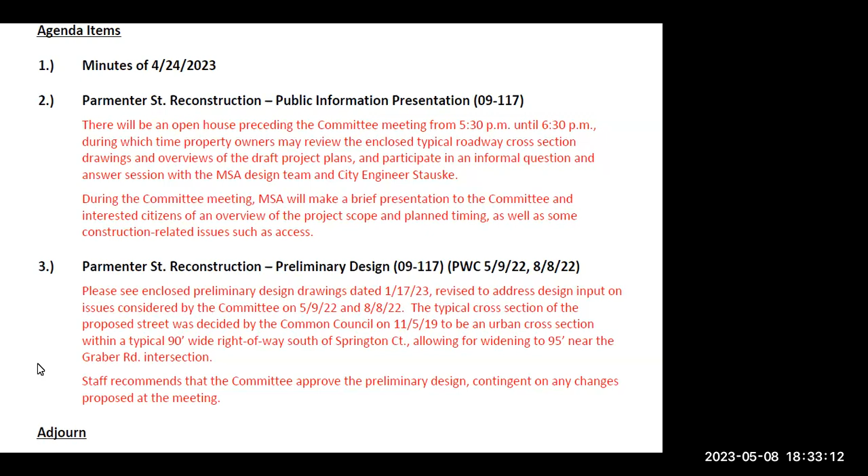We have a design team from MSA Professional Services with us this evening. They were here for the open house, so many of you already got to meet them, but I'll say hi to Krista Sommerfeld, who's been doing a lot of the design work, to Bill Pinow, who's the project manager, and to Kevin Lord, who oversees it all. MSA is here, and I've got slides that'll show up on the TV, but I warn you up front, the TV may inexplicably and without notice turn itself off every now and then. It just needs a rest.

Sean, before you begin, can you turn on - I have a speaker on my meeting that says council chambers. Is there any way that you can do that so I can see the council chambers? Is there any way you can turn that camera on, or is that not possible in this format?

That's a good question. Let me see why that's missing. Yeah, hold on a second. Thank you. I think that's where the audio is coming from, if that helps. Testing. There it is. Thank you. Did that work? Yep. I tell you, if you push enough buttons in this room, something happens. Thank you very much. Yeah, well, good call.

All right. So I'll turn it over then. Is that microphone on? Is there a little green light on the top of it? Yeah, Krista figured it out, so I think we're good. Sweet. That's usually my Achilles heel. All right, Sean, thank you for the introduction.

Again, my name is Bill Pinow. I'm the project manager for the Parmenter Street project, and we're just going to give you a high-level overview of the project to date. Sean's going to go through some slides. You can go on to the next one, which is just the introduction of who's here tonight, in addition to Kevin Lord, who's also a team leader. Go on to the next one.

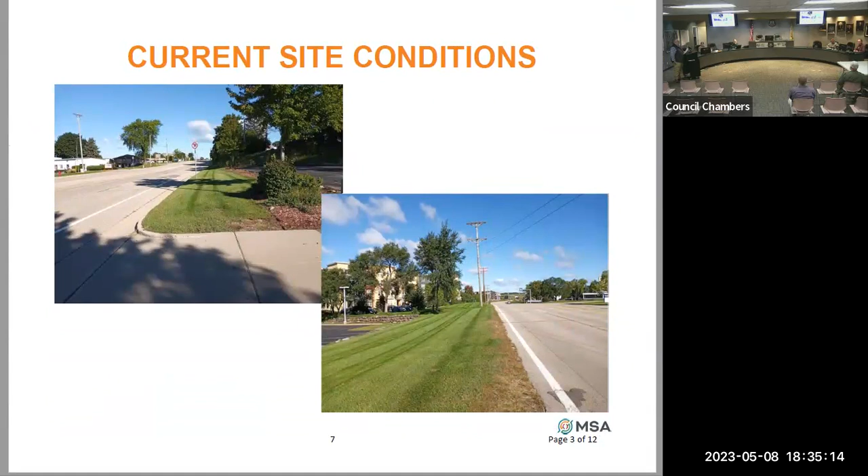We just included a couple site photos of Parmenter Street. We met several of the property owners located along the property, so everyone knows what we're talking about here, essentially from Century Avenue to Greenbriar Road, which is currently a rural cross-section roadway that we'll be reconstructing after working with Sean and city staff. We can move on to the next one - again, just another photo of current conditions out there.

The project goals are to reconstruct Parmenter Street, again, from Century Avenue to Greenbriar Road. We are essentially converting the rural section into an urban cross section that will have bike lanes, sidewalks, and a multi-use path connecting to an existing path at the north end. In just a few minutes, Krista will go through more detail on those cross sections, but that cross section is something we've worked on with Sean, the city of Middleton.

The design intent is to have a median at the center of the two lanes, and that will be grass temporarily. In the future, should there ever be additional capacity needed, that median can be converted into additional lane storage. Because we're adding additional lanes to the project and additional impervious surface, there is going to be some added stormwater management requirements.

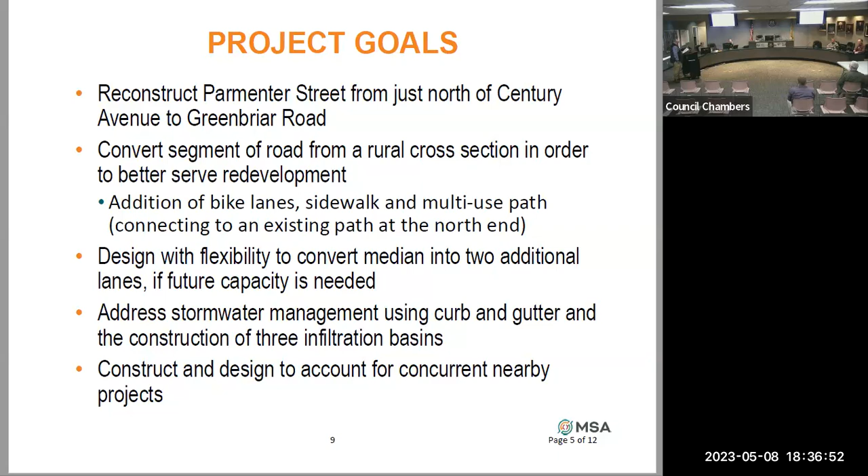So we've got some infiltration basins that Krista will show the locations of as well. The project is also designed to account for some additional projects that'll be in the area, like Bell Farms and Tribeca. This is just a project overview showing the extents of the project - like we said, up to Greenbriar from Century.

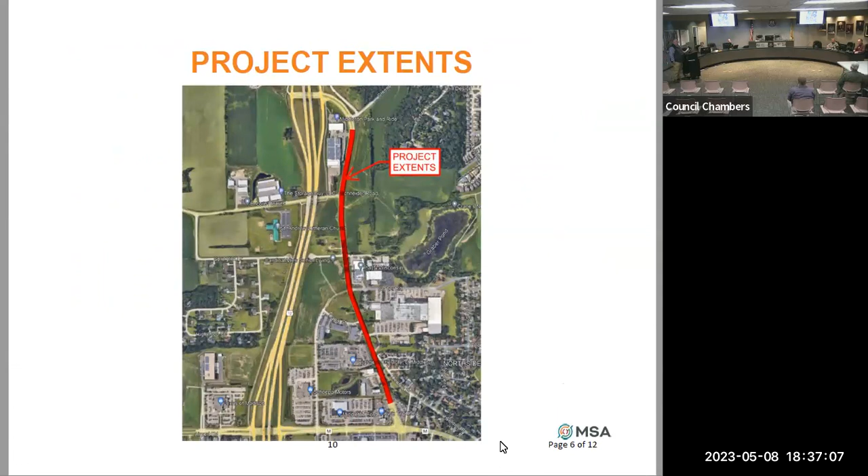It goes black on your end too? Yeah, it does. Okay, so the black screen you're looking at, there it is.

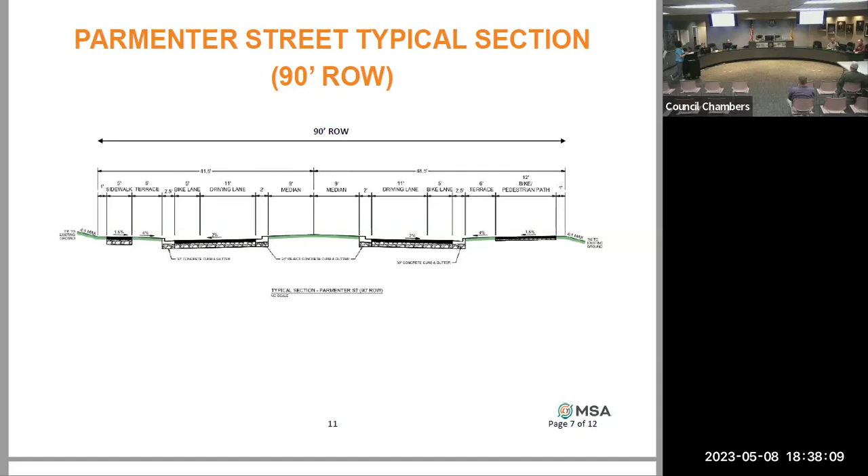As you get further north on the project, this varies a little, mostly with the terrace space widening. We have a little more width in the right of way on the north end. Furthest north, we are eliminating the bike path and sidewalk, but that's adjacent to the operations center building up there.

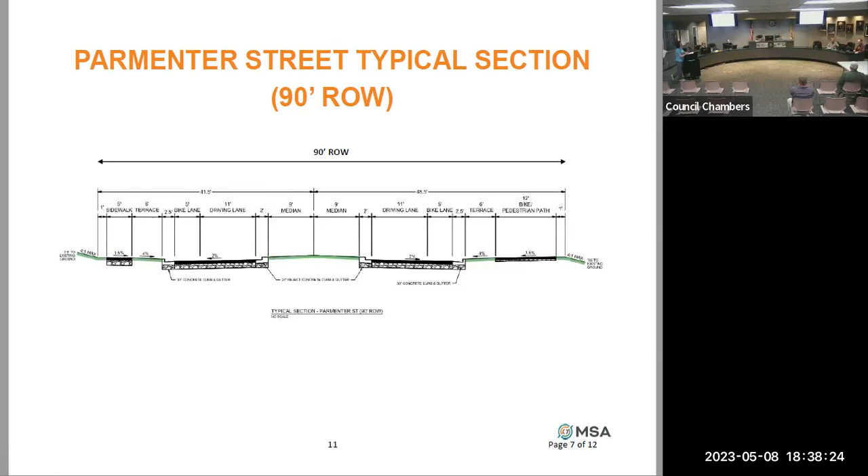As far as the stormwater goes, we need to account for additional impervious area. The majority of that is on the north end. We're converting it to curb, or from a vegetated area to a vegetated swale to a curbed area.

Again, those are located in the right of way. The final design is not done yet, we're waiting on some more information, but essentially linear ponds there. Some other aspects of the design include storm sewer throughout the roadway, including some basins to collect water behind the sidewalk and trails, and also some minor water main work, including some hydrants.

Kendra, did you have your hand up for a reason? Yeah, can you have her check her microphone, because I think it cut out. Is the green light still on? Maybe the batteries are dead. That happens too. Batteries go dead, but they don't take out the green light. Let's hope not, the green light came back on.

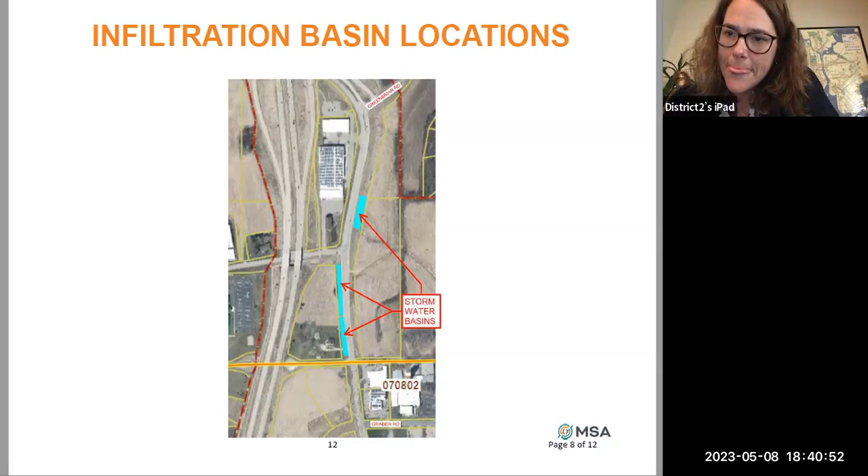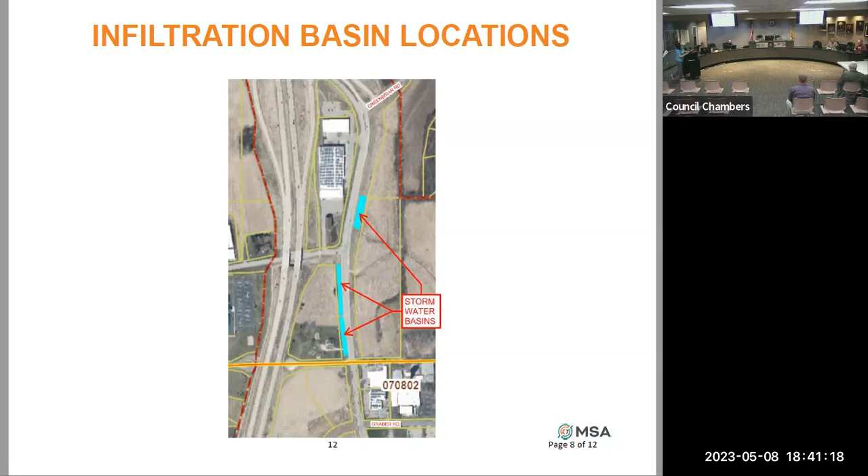Okay, yes, hopefully this one works okay. Oh, black screen. Okay, that really sounds, this one works really good. I can hear it, right? Yeah, I can hear you. Look at that. You can go to the next screen. Sure, but thanks for that feedback, I appreciate that.

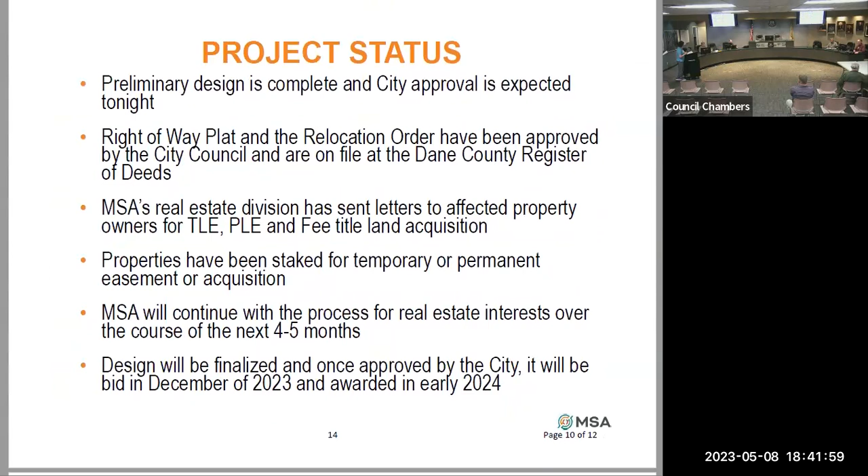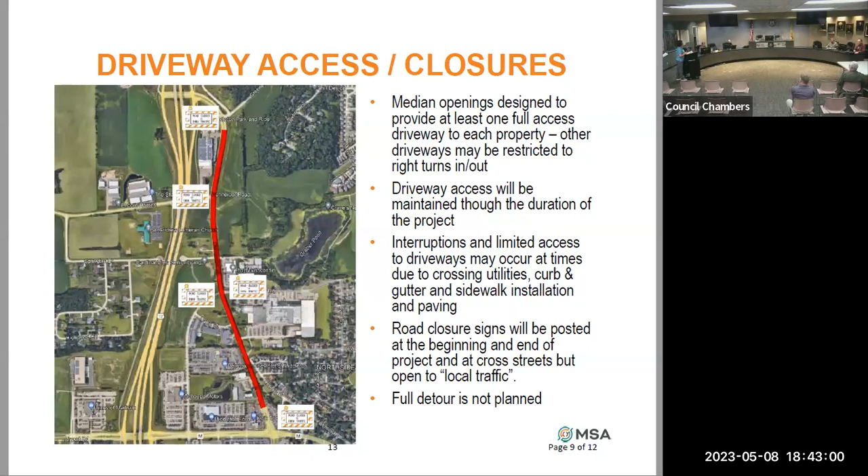We're not planning on posting a full detour route. We can talk more with Sean if we need to about that, but just road closed, local access only.

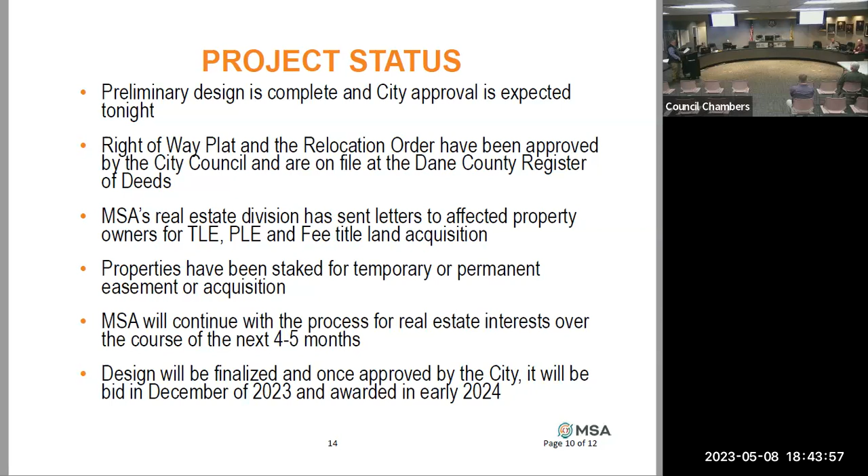As far as other items that have been completed, we have completed the right-of-way plat and the relocation order that has been approved by the city council, and that's currently on file at the Dane County Register of Deeds. Any property owners that have real estate interest in the property, I believe 16 letters have been sent out, so everybody that we talked to tonight has at least had that initial contact. Those discussions will continue for the next 4 to 5 months after the properties are appraised, and then there is continued discussions with the property owners.

Again, I've explained this a couple of times. There's basically 3 different types of fee interest. There's TLE, temporary limited easement, which is a short-term easement used for grading during construction. There's PLE, permanent limited easement, which stays in place after construction, typically for stormwater. And then there's fee, where actual right-of-way is taken or acquired from a property owner by the city. So we have all 3 of those involved in this project.

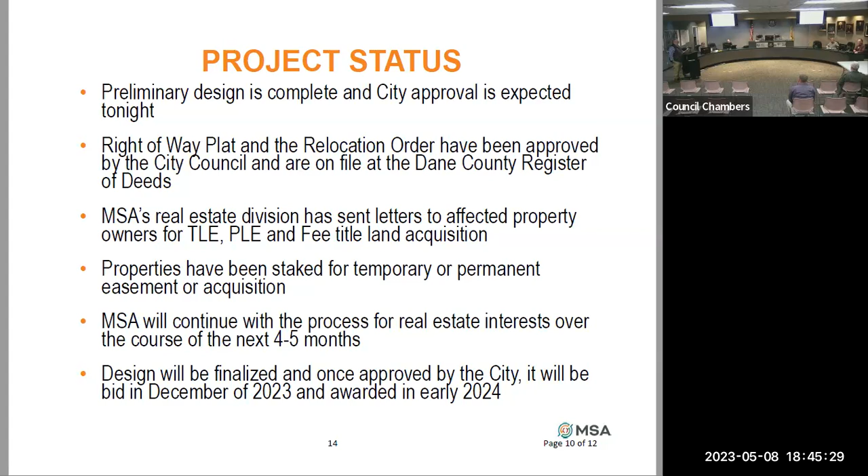Currently, we have had the property staked for those 3 easements or fee, and that real estate process will continue for the next 4 to 5 months. Then essentially after that is completed, the design will be finalized. Once it's approved by the city, we're expecting it to be bid in December of 2023 and likely awarded in early 2024. You can go on to the next one.

As far as planned construction after the bidding process in early '24, we would expect construction to take place sometime, weather pending, April or May of 2024, take approximately 3 months, and be completed by the end of summer in 2024.

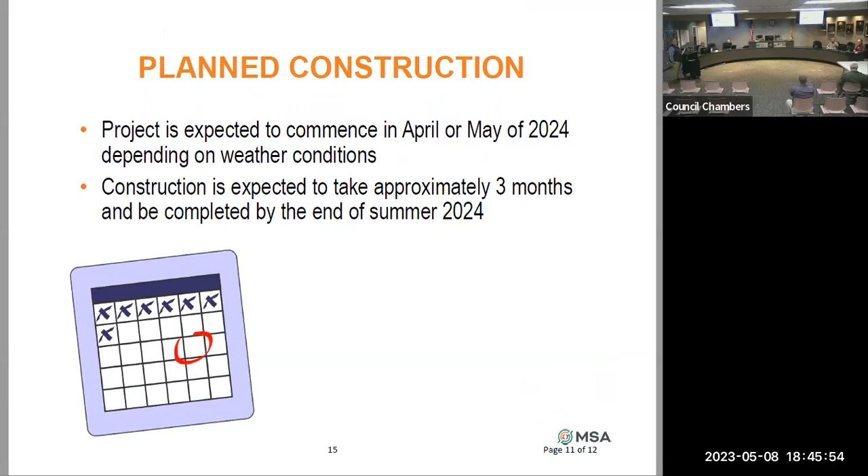And then Krista, myself, or Kevin are here if there's any additional questions from staff. If members of the public have any questions at this point, this would be your opportunity to ask them as well. I would say if there is a question that we weren't able to address during the open house portion, if you would use the microphone, folks at home could hear it.

Now that it's working, right? No, it's working. Now that it's working, nobody has anything to say. Well, that's okay too.

And obviously, you have contact information for folks, so as questions do come up, let people know. There are several follow-up questions that we'll have based on conversations during the open house.

Good, okay. All right, committee members, anybody have any questions of the folks making the presentation? Well, I guess I have a question about the agenda because I do have questions, but our next agenda item is to talk about the design, correct? Right, yep. So should I just reserve my questions for that? I think so. We'll wait till we get to the action item, and then you can do it then. Thanks. All right, well, if there are no questions from either members of the committee or members of the public in attendance, we'll move on to item number 3 on our agenda.

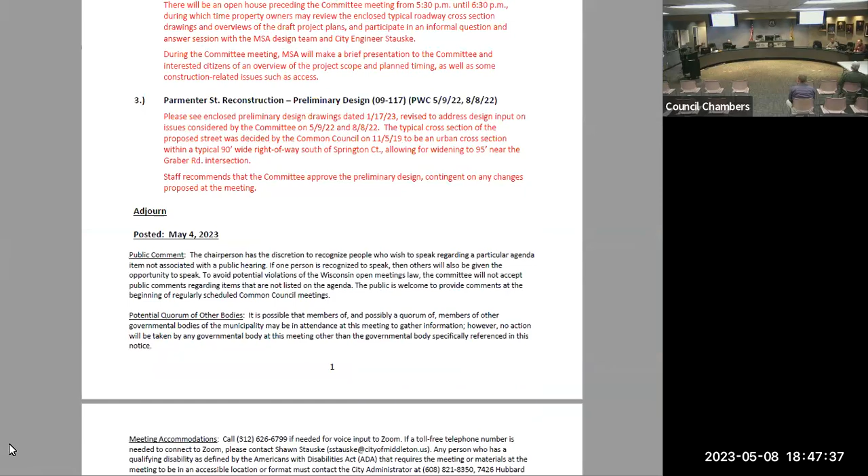Which is Parmenter Street reconstruction preliminary design. And this is the point at which we will make some decisions. So having heard the information that was presented, now, Lisa, if you have questions, now would be the time to proceed, I think.

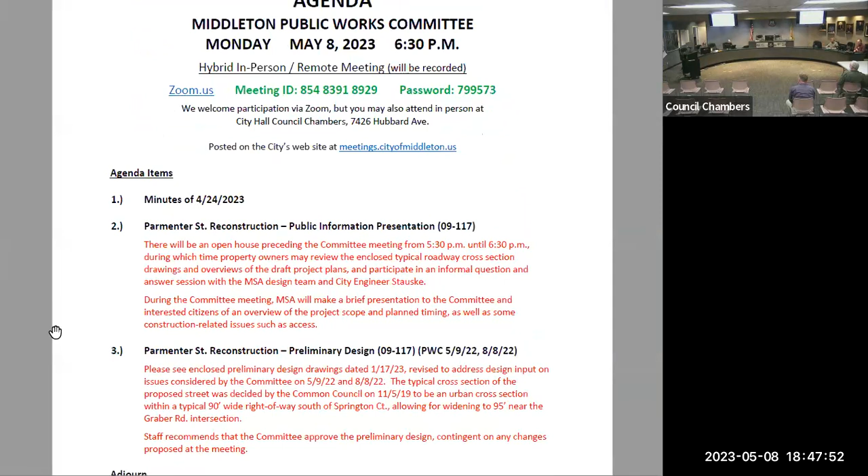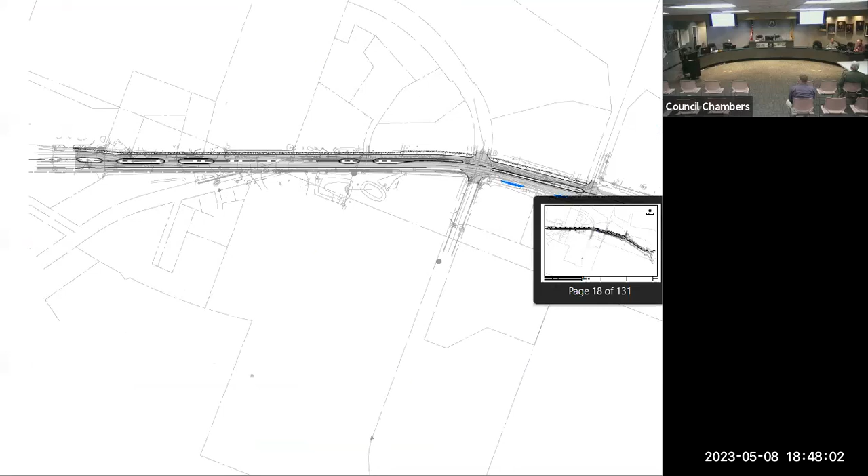Thank you. Let's start with the stormwater basins. If we could bring up the map. I'm looking at pages 21 and 22 thereabouts, and that's just the number in the packet, so I'm not sure what number it is in your file. First of all, I saw the reference to Prairie Nursery as being the source of the seeds or the plant mix that will go in the basins, and I love them, so I hope you definitely will use them.

Who will be responsible for maintaining these basins? I assume that's a city responsibility. Would Public Works or Parks have that, or it depends on who's available? It might depend what it is, but typically things in the right of way have been maintained by Public Works. Things that are outside the right of way, it's been a little bit of a mixed bag between Public Works and Parks. Okay.

I know that neighbors will come to love seeing the flowers and wildlife that will be growing and living in these basins, so I hope we'll be mindful of not mowing at the height of the growing season, which has been an issue for some folks in District 6. I noted on the maps there are several places where it says delineated wetlands, and I'm just wondering, are these stormwater basins going to be located where there's already a wetland existing?

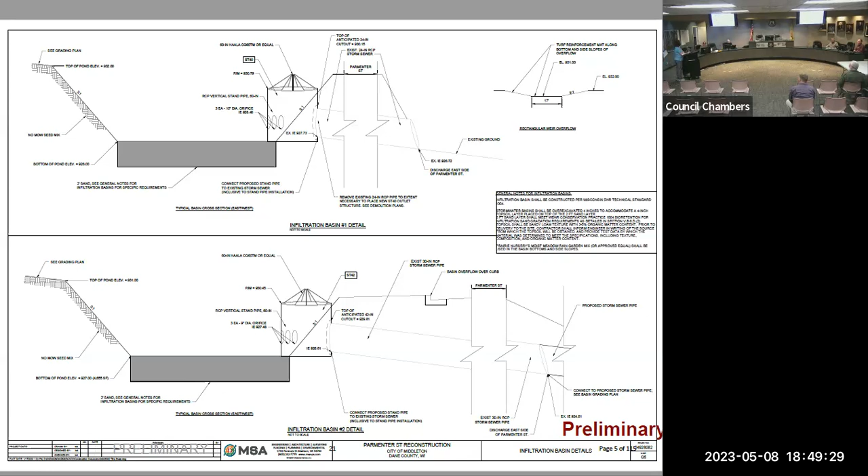It seemed like there was only one spot where there's a delineated wetland that doesn't have a stormwater basin planned for it. Oh, sorry, Krista, if you could go to the microphone. Yep, and now I'm looking at page 27. Let me bring that up on the screen then, if that helps.

So you're looking at these blue areas. Is that right? That's what it looks like. Yeah, so those blue areas are the delineated wetlands. That's further south than where the basins are right now.

Let me get my bearings here. Yeah, because that's so great, this is just north of Tribeca Drive, north of Graber. Yeah, so there's a ditch line there, and some of that ditch line is the delineated wetland. That's where the trail is going to go through on that side. The other delineated wetland is further north where the basin is.

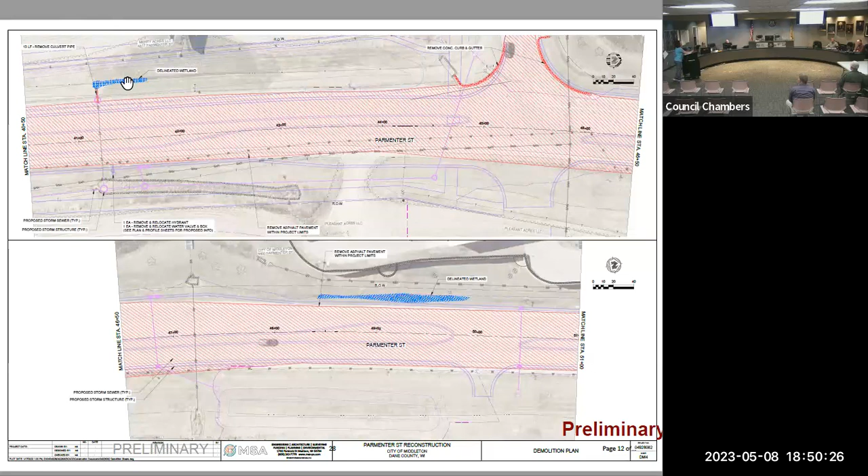So maybe page through a couple more. Yeah, let me go back to 28. Yeah, so those two blue areas there is where the infiltration basins would be going. Okay.

Let's talk about the multi-use path. I'm wondering why not have a multi-use path on the north, east, and west sides of the street. If you go to the first slide that shows the typical cross section, it's got sidewalk and then multi-purpose path. Maybe not that you need to change this for me, but I do ride my bike to Middleton Outreach Ministry from my house, and I'm wondering why, especially with the apartments there, wanting to encourage people to commute on their bikes, why would we not put a multi-purpose path on both sides and not just have a sidewalk on the west side?

Yeah, and it was actually a little bit tight. This was talked about a couple of years ago through various committees and the Common Council before it was landed on as a 90-foot wide typical right-of-way section. Within that, we were starting to get really narrow terraces already, so there was concern with city forestry that the terraces any narrower wouldn't support tree growth or snow storage. And there isn't much that makes the snowplow guys less popular than having snow on sidewalks.

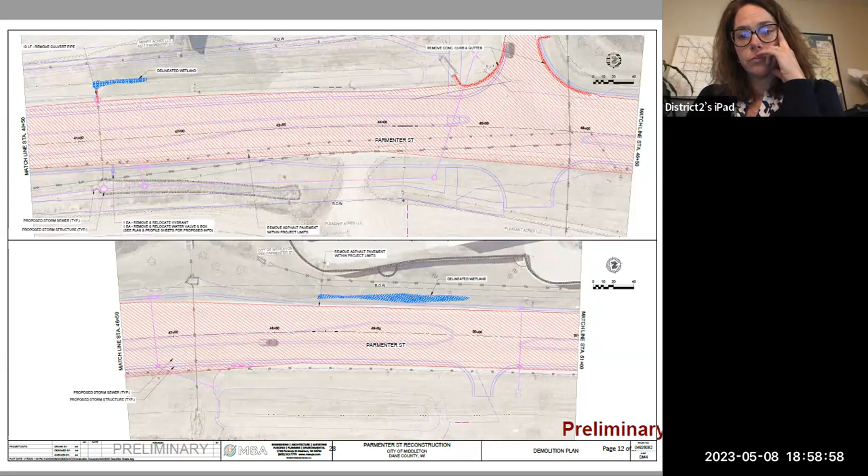I'll make a motion that we approve the preliminary design for Parmenter Street. All right, we have a motion to approve the preliminary design. Is there a second to Carl's motion? I'll second, this is Kendra. Who seconded it? Kendra. Okay, I'm sorry, I didn't hear that.

All right, we have a motion and a second. Any discussion? Well, I'm just wondering, in approving the preliminary design, what happens to things like having green paint for the bike lanes, or considering whether it's possible to put the multipurpose path on both sides? Yeah, we'd have to talk about that and think about it and come back to the committee during, or prior to, final design with some of those issues and options for consideration.

Further questions, further discussion on the motion? Hearing none, all those in favor of the motion signify by saying aye. Aye. Those opposed, nay. The ayes have it, and the preliminary design is approved.

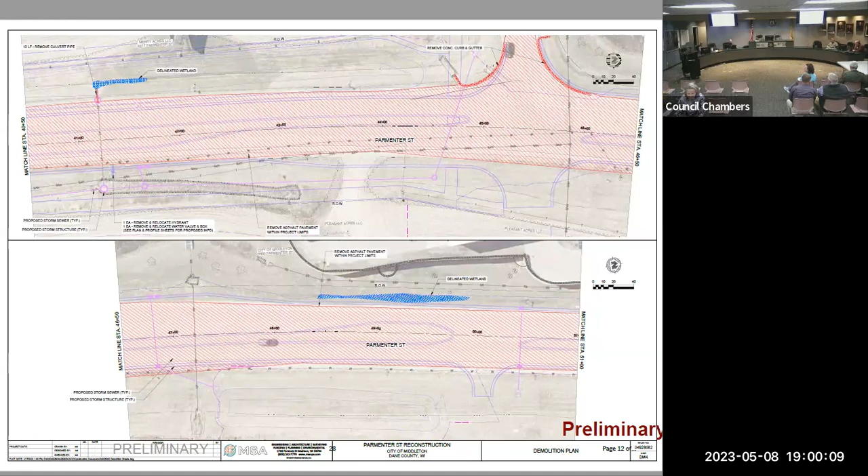And that, I believe, brings us to the end of our agenda for this evening. Yeah, let me hop back to that. So it is, right.